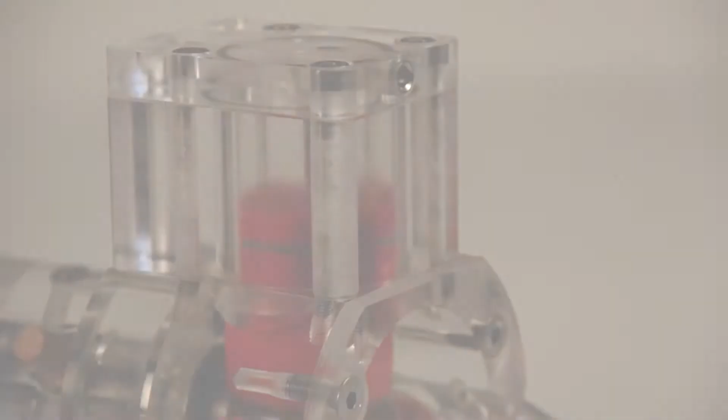Thanks to their non-sparking operation, air motors are often considered an ideal solution for applications in hazardous environments. As a leading manufacturer of air motors, Huco specializes in piston air motors, which are more efficient than traditional vane air motors.

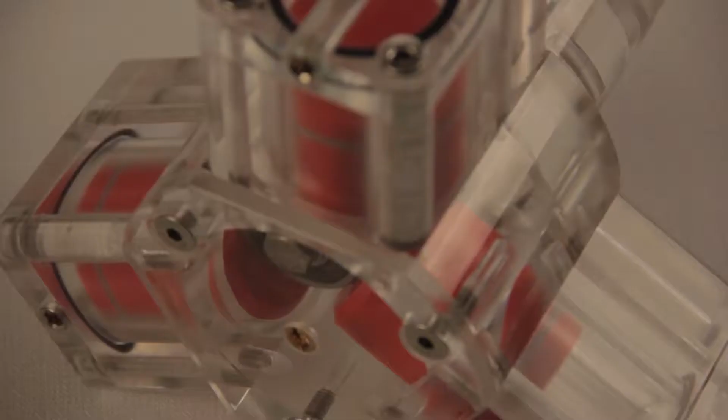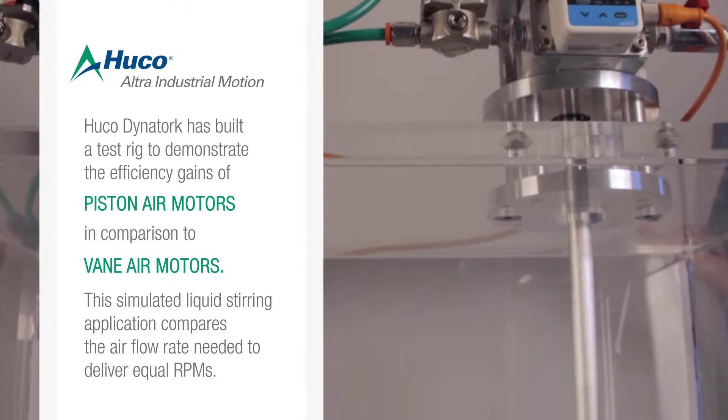Huco's Dynatork motors use less air, make less noise, and use non-lubricated air, which means they are better for the environment. But what are their real-world performance figures compared with vane motors? Huco has built a comparison test rig to demonstrate the advantages.

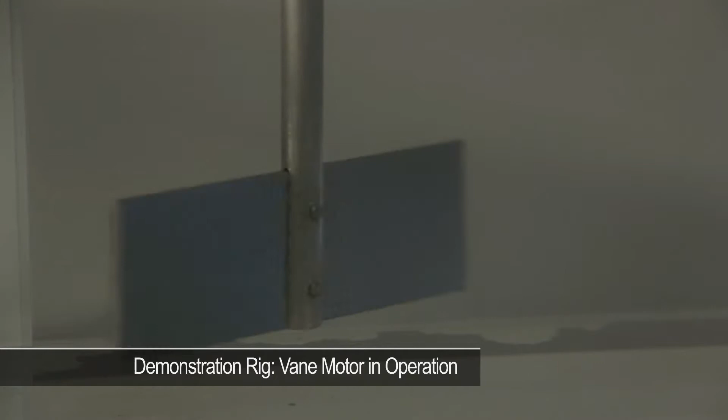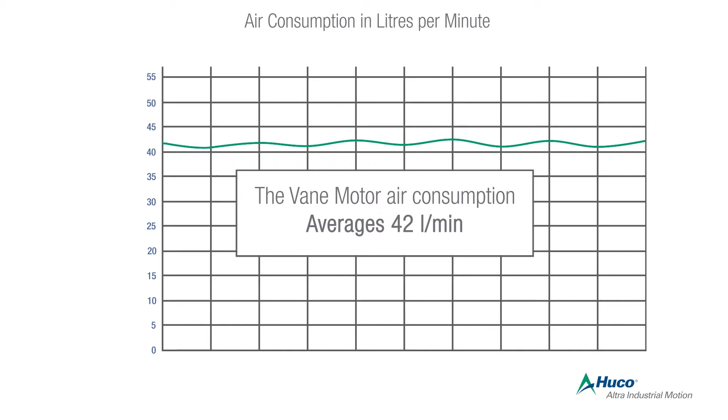Vane motors operate like a windmill inside a cylinder. Compressed air is used to propel the blades and turn the shaft. These devices are less efficient, so require a greater amount of compressed air to operate. They also take a few turns to build up maximum torque and can overrun slightly after the compressed air is switched off, which means they are less well suited to controlling positional accuracy.

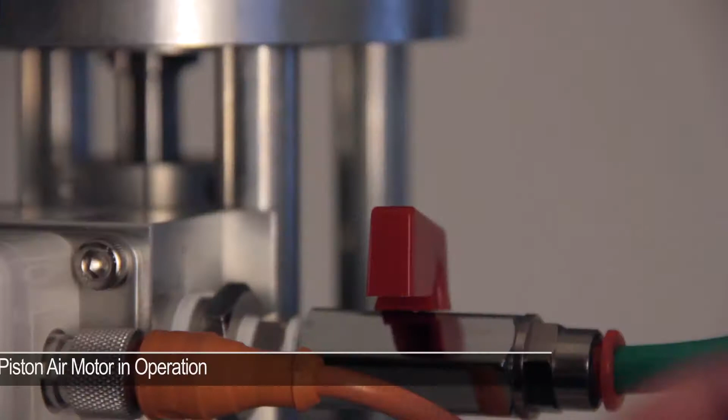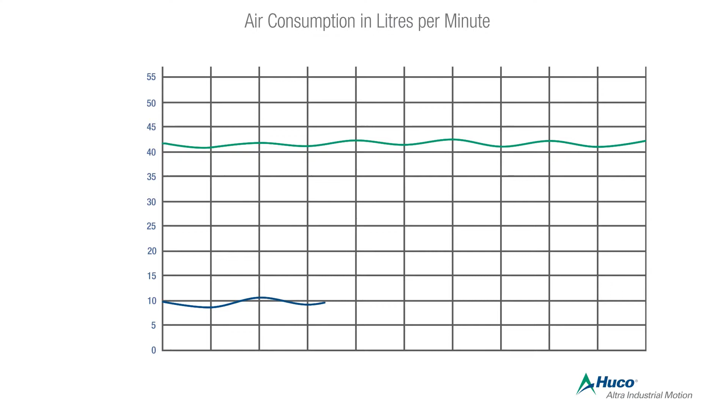Piston motors use reciprocating pistons to turn a central shaft, much like a petrol engine. The Huco Dynatork piston air motor is intrinsically efficient, requiring far less air than its vane motor counterpart. In stirring applications, piston motors can do the same job as a vane motor, but using as much as 75% less air.

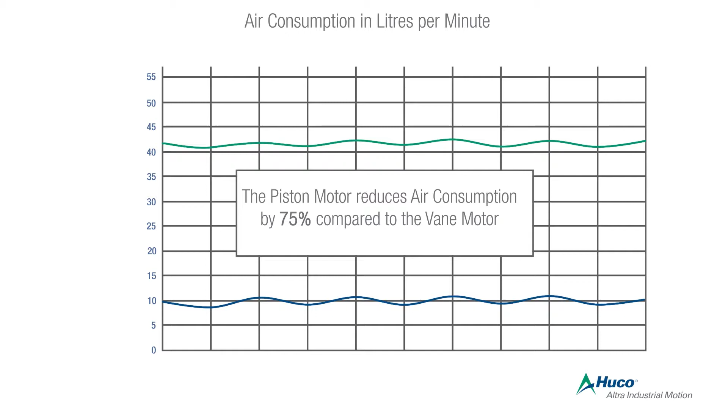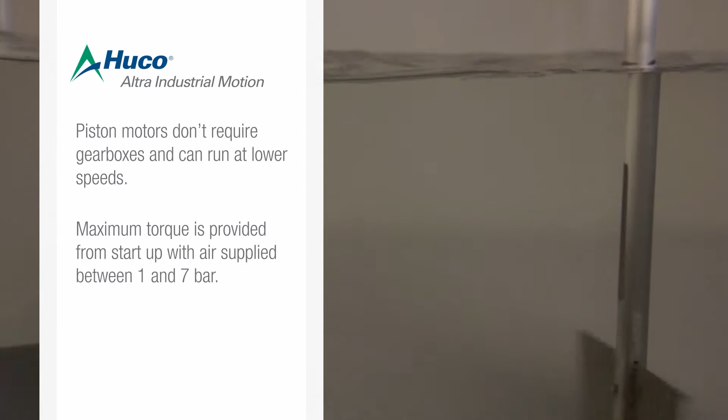The free-floating pistons of the Dynatork motor transmit maximum torque on startup. This can be easily adjusted via a pressure regulator. The result is high torque, even at low speed, precise speed and position control, and very low noise operation.

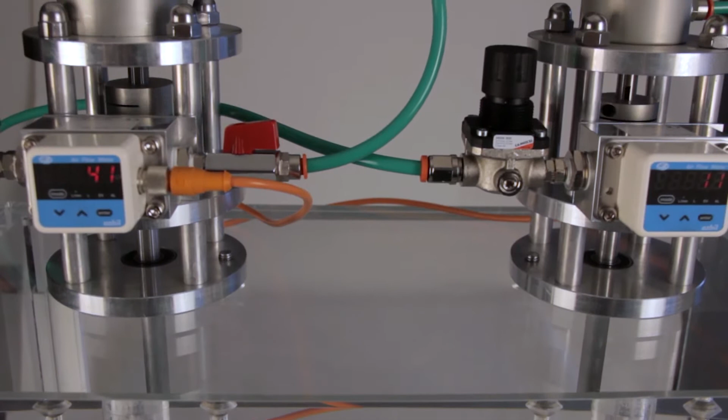This design offers very high efficiency because the leakage of air through the motor is minimized. There is also no possibility of sparking, making the motors suitable for use in ATEX Zone 1 applications.

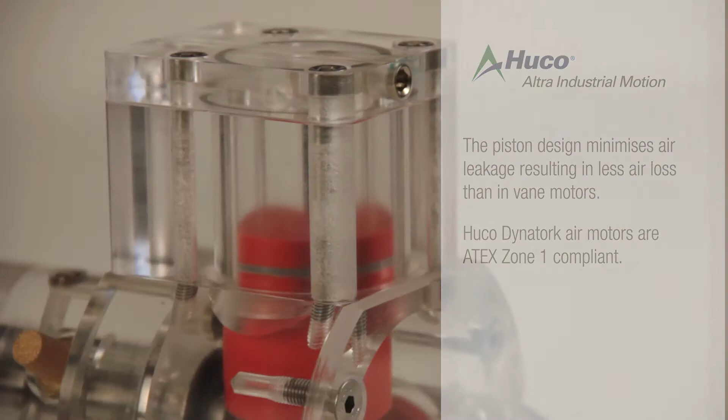As a result, the Huco Dynatork piston air motor is cost-efficient in energy consumption, non-contaminating, quiet, and offers instant control. Furthermore, the motors are fully submersible and corrosion-resistant.

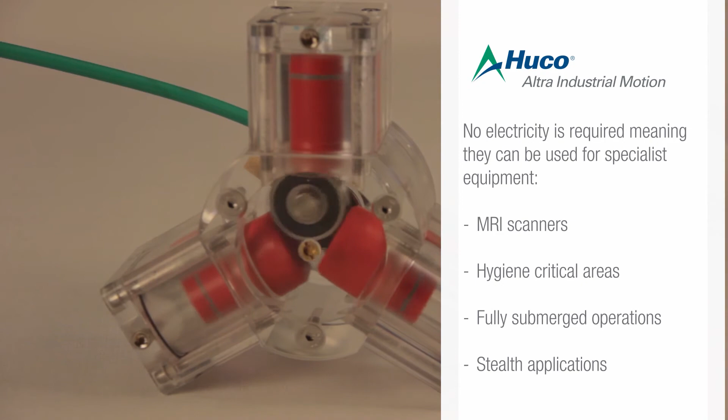Huco Dynatork. Simple reliability for the most demanding applications.